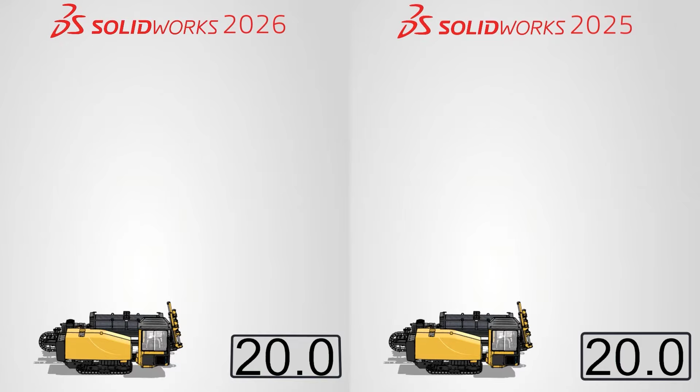So if you look at the open diagnostics area now, which is that little box that shows up as you're opening an assembly, it helps to identify two big things. One, which components are slowing things down, and two, which mates, if any, are slowing things down. It's one of those areas that can seem pretty invisible to you, but once you notice, it has the potential to help you every single day.

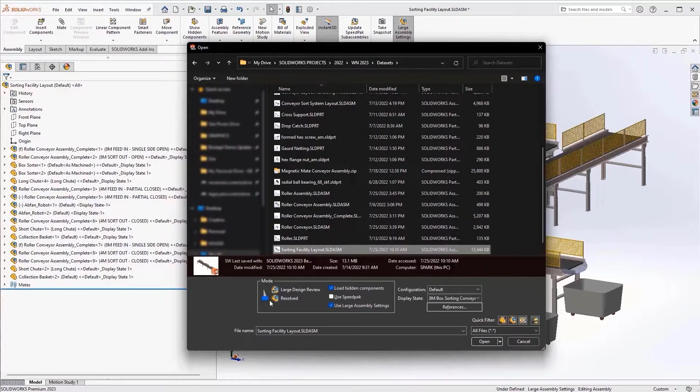Number two, automatic resolve mode. So back in 2023, SOLIDWORKS Design got smarter about how it opens your assemblies. The new automatic resolve mode, it's basically deciding when to use resolved or lightweight mode for you. So you don't need to be an expert necessarily now on which modes to load your model in. There's no more manual toggling there that's needed.

In essence, how does this help you? Well, you get to keep performance gains without having to give up full detail that resolved mode brings in whenever it's required, but that's just it. You leave it to the software to help you load it in when you tell it by virtue of trying to access something that requires it. Okay, so best of both worlds there.

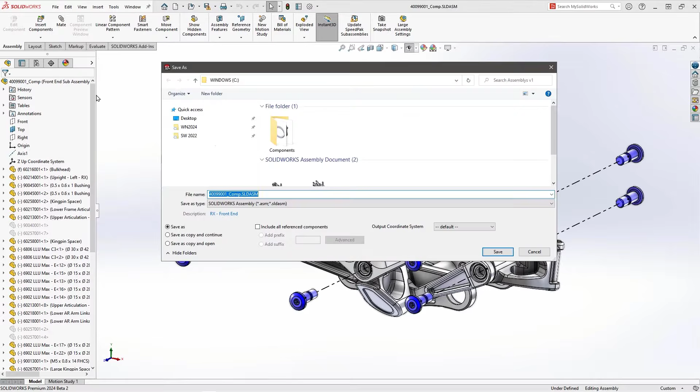Number three, save as previous release. Backwards compatibility. Those are two words that SOLIDWORKS users, I'm sure, have uttered many times. It's finally arrived for assemblies, parts, and drawings. You can now save your assembly back up to 2 prior versions and include all of its references, all of its sub-assemblies, its parts, its drawings in one go. What does this mean? Well, you don't have to have any more file version or SOLIDWORKS version standoffs with your teammates or your suppliers, which I've been there. I know it happens.

Number four, copy with mates. One of, in my opinion, the most underrated tools inside of SOLIDWORKS Design just got better in 2025. So in 2025, what happened? Well, copy with mates started supporting advanced and mechanical mates, things like slot mates, gear mates, screw mates, and hinge relationships. So what this helps you do is reuse your design intent that you've established in a pre-created mate across assemblies way more powerfully.

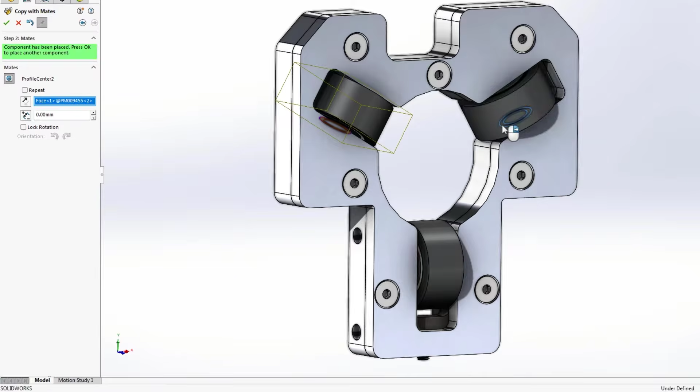Number five, import filtering. Now, if you've ever worked with a massive STEP file assembly just to work with like one bracket or just one part, this is the feature that you are looking for. You can filter your STEP imports by component, which allows you to bring in only what you need without waiting for the rest of the stuff that you're inevitably just going to delete anyway. That is a massive win.

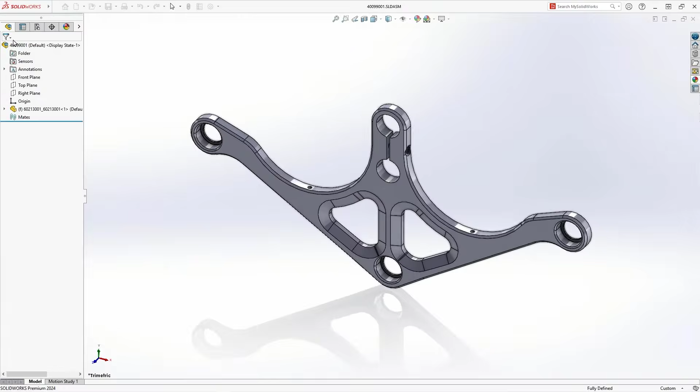Number six, auto repair mates. Mate errors happen, right? It's part of having a constraint solver inside of CAD software, right?

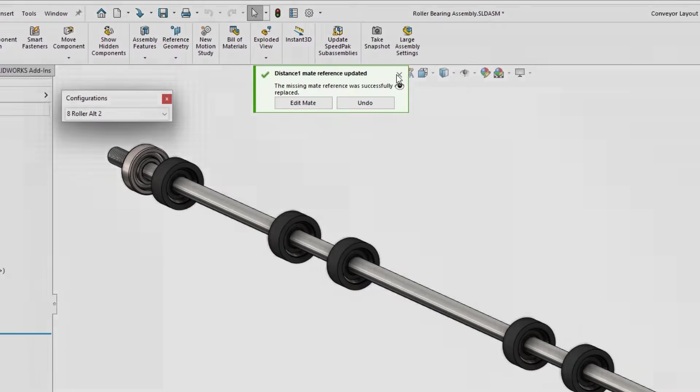It's just a reality. But I will say, in 2024, we did add a tool called Auto Repair Mates. Essentially, it's a one-click way to potentially detect and fix your broken mates even after replacing components where some of the edge IDs or face IDs might not directly match up. Those areas where you'll look at a model and a set of mates that seem to have erred and think, hey, I can look at it right away and I can tell that these parts are similar and that mate shouldn't have broken.

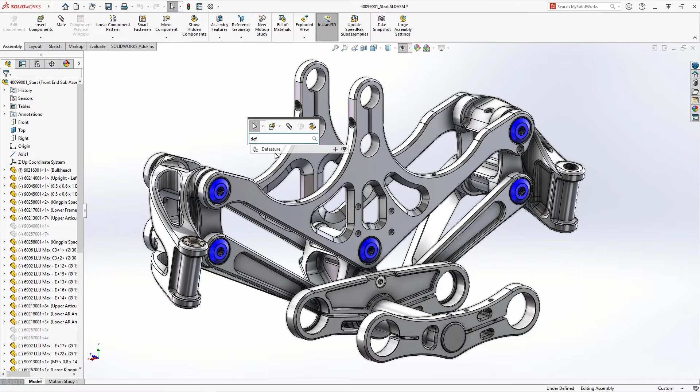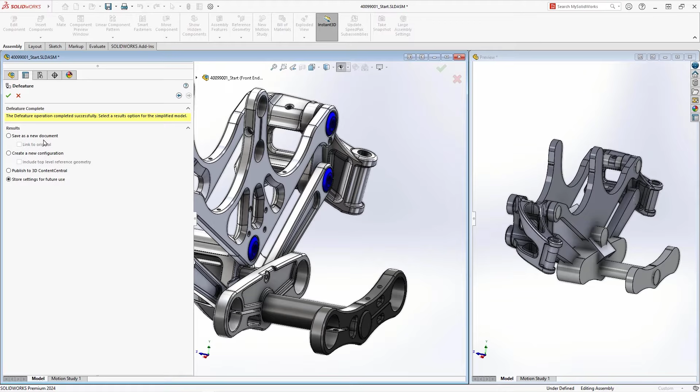Number seven, rules-based defeaturing. Defeature isn't just manual anymore. I mean, defeature, that tool to simplify and take out sensitive IP from your data sets, that's been in the software for a while, but we've made it more automated and more replicable across your data sets. So essentially what it does, as you can see here, it lets you define and set logic for things like which components stay detailed and which simplify automatically. In essence, it's a smarter way to protect your IP in these scenarios and to boost performance if you're going to be defeaturing a bit often.

Number 8, fastener automation. This one is a fan favorite. It's gotten a lot of claps in virtual and in-person rooms that I've discussed it in so far. It's a very new feature. It just came out in a recent release of SOLIDWORKS Design 2025, fastener automation. So using some AI here, it's going to be able to recognize holes and then automatically insert and mate nuts, bolts, washers.

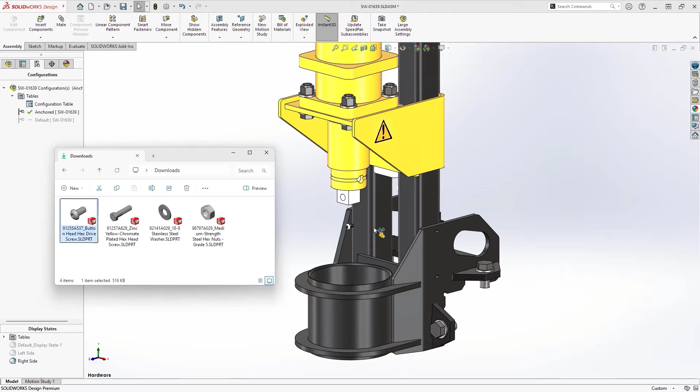Now, here's the thing. They aren't necessarily toolbox parts. They aren't even necessarily SOLIDWORKS parts. You can do this with non-native files like STEP files or Parasolid files. In a way, you could think of it pretty much as your assembly assistant, faster, more consistent hardware application with fewer clicks. You don't even have to hold a keyboard shortcut or anything like that.

Number 9, phase-based revisioning with cloud services. So if you have SOLIDWORKS Design, you have cloud services, period. It's accessible to you. I've incorporated one of my favorite enhancements from cloud services in recent releases, and that's phase-based revisioning, in this video. So if you manage design life cycles, this new revision system is potentially a really huge deal for you in terms of automating processes.

So with phase-based revisioning, essentially what you're doing is you're defining revision schemes based on life cycle stages. So the prototype phase of a design, the release phase, really any phase, they can each have their own numbering scheme, naming scheme, lettering scheme within your revisions. One thing that I think is really exciting about this is that it potentially cuts down on internal knowledge transfer, right? If you have a system that's doing this for you, there are less conversations, less training, less retraining on appropriate protocol, and less chance for mistakes.

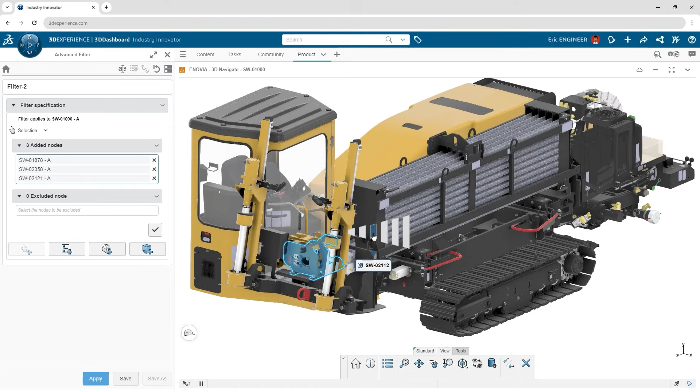Number 10, selective loading. Selective loading is potentially a real game changer, especially if you're using large assemblies. So if you're using SOLIDWORKS Design, you can now open filtered selections of large assemblies directly into SOLIDWORKS Design without having to really add any project structure whatsoever. So think if you have a large assembly like the one you see here, this Premier data set, you just want a subsystem of it, a few key components so you can mate them properly, measure them properly, add just those into a drawing without loading the entire thing or adding another assembly just to do these sort of common tasks, right?

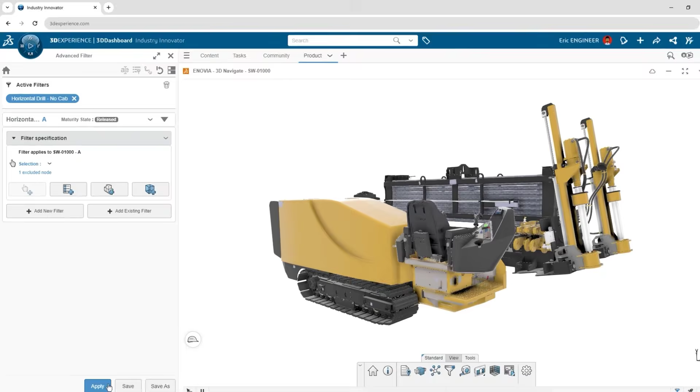So what this allows you to do is you can pull them in fast and skip the load time for the rest of the assembly. It's like those two worlds, that world of control and that world of speed, and you kind of mash them together. And that's really what selective loading gives you.